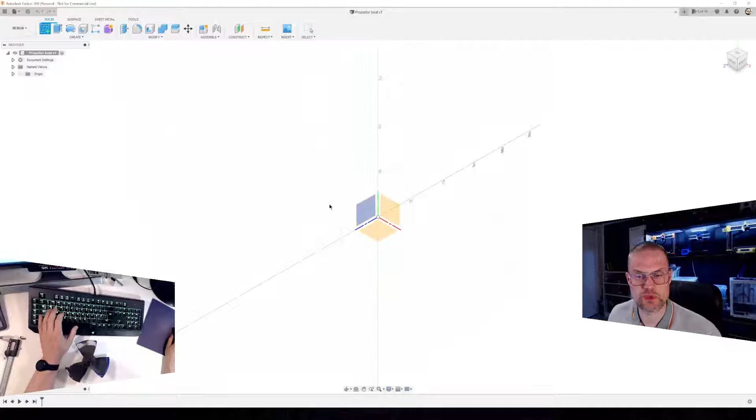To talk about the piece, as I see it, I have 2 things that I need to make. It's the cone in the middle and of course the fins. I only need to make one of the fins, and then I should be able to just copy them along this axis. So let's jump into Fusion. If I can make my systems work like this. Yes, we start with a blank piece of paper. And yeah, we can start by finding, are we gonna do it on this?

Like that. Okay. Normally when I do a piece like this, I will just start by making some measurements and put them into some drawings and stuff like that. But we are actually trying to do it a bit differently today. Fusion360 has this great way of using images as reference, and I'm just gonna find my image folder. There it is, and we will start with this one. That's the image, and over here you can see it needs a face.

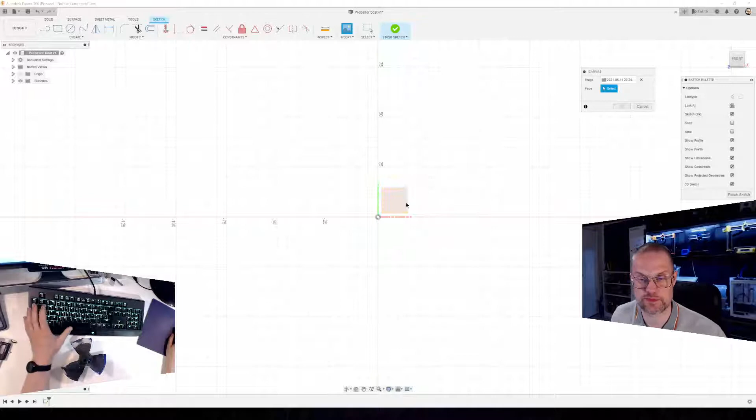For those of you who don't know, when you use Fusion360, you can only draw stuff on planes or faces. So this is of course a plane because we haven't made any faces yet. I'm just gonna pull it out a bit. Oh, there it came. Okay, let's just keep it there for the time being. I already know some of the measurements. We need to find out the complete diameter on some sort of level, but I think for now we will just scale it from this. Perhaps 12 millimeters, that sounds about right for something that's been machined for the purpose.

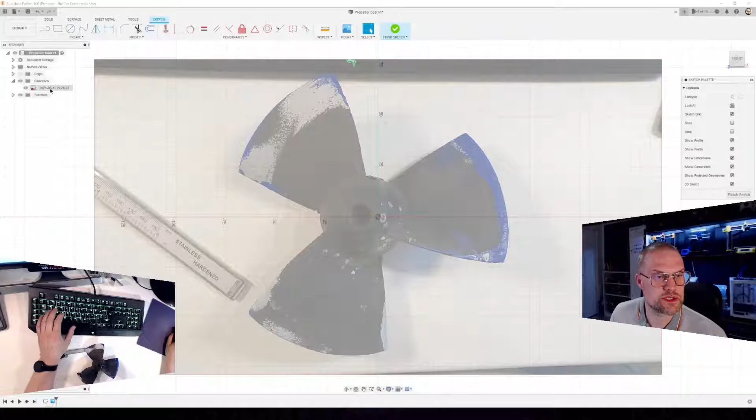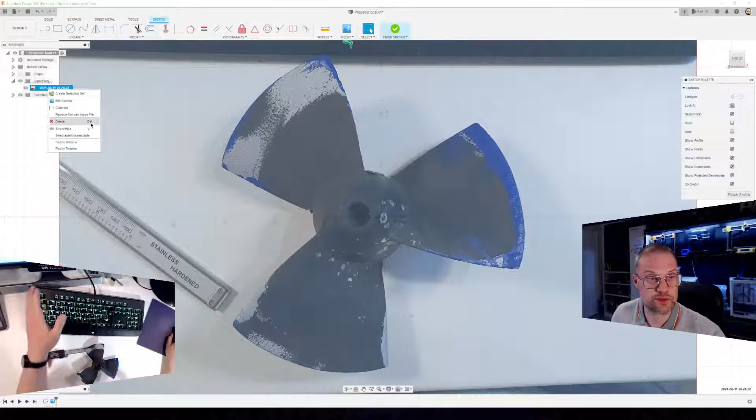And here comes the really neat trick. I want to put this right in the middle. Can I do that? No. Well, the canvas can be calibrated, which means that I can tell it that from this point to this point, perhaps I should have made a line first, but that has to be 12 millimeters. It will of course scale the entire image up. And I really want to put this in the middle, and I'll tell you why. Because that center point right there, that's where I want my middle of the drawing to be. I don't remember. Yeah, like this. Okay, let's see if we can get it in the middle.

Okay, it's late. It's very late. And my chat went away. There it is. Okay. Please tell me if you can't hear me or the background is too loud, which I don't think it is because it's actually not playing any music. That's weird. Super weird. Let's get this away.

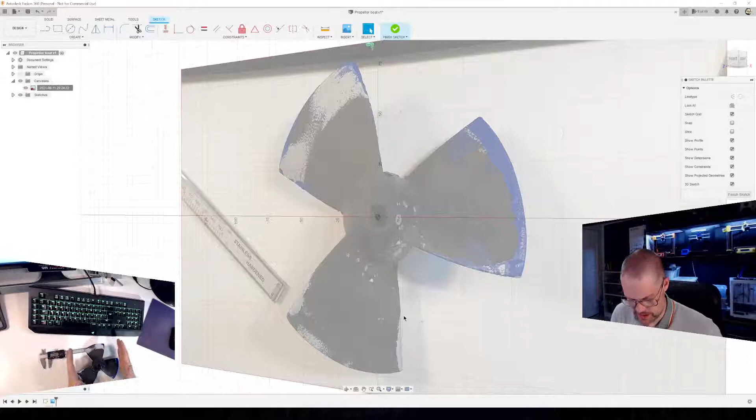Okay. Let's keep it there. Okay. Now this part of the drawing, I really want to make it on the other side also. I wonder if it would mean a lot if it wasn't exactly the same diameter, as long as it's not bigger, I guess. If it's 1 or 2 millimeters too small, I guess that could be okay. Perhaps. I don't know.

Thank you, Luis. It's always nice to know. I can't hear myself. That's why I'm asking.

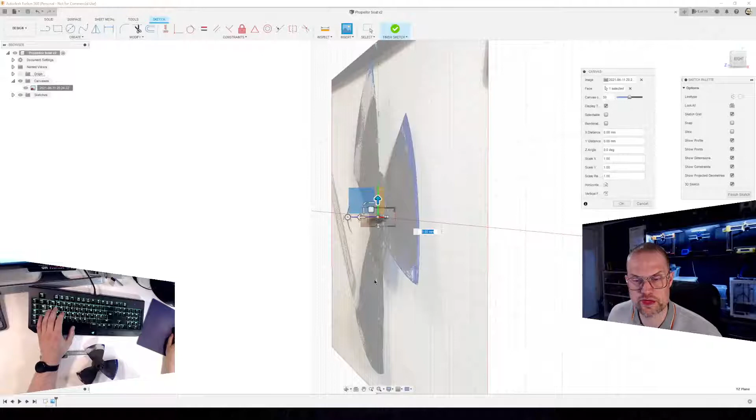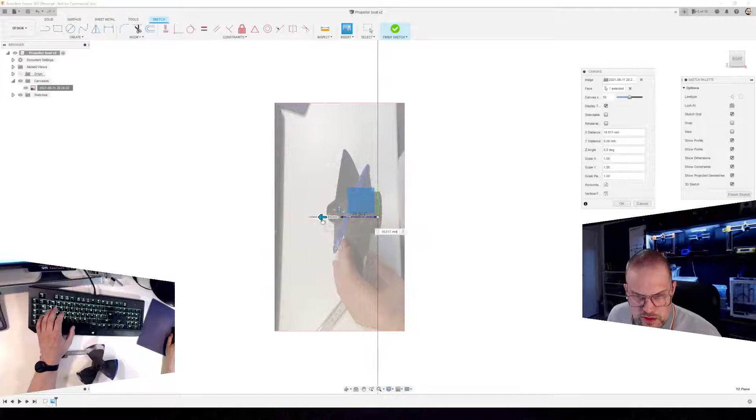Let's remember to save. I think we're gonna put in another picture just to show how we can do that also on the other axis actually. Okay, this should work. We want that going on this side, and we of course want it to be facing the right direction, and 90 degrees this way. And if we are very lucky, we can also make it sit like this, and I want it to be as close to the center as possible.

Okay, so this is a bit more tricky because we need to scale this up like the other one. And of course we could find some places and measure and do this again that we did before. But I think I am just going to do a scale to kind of just wing it a bit. Let's see.

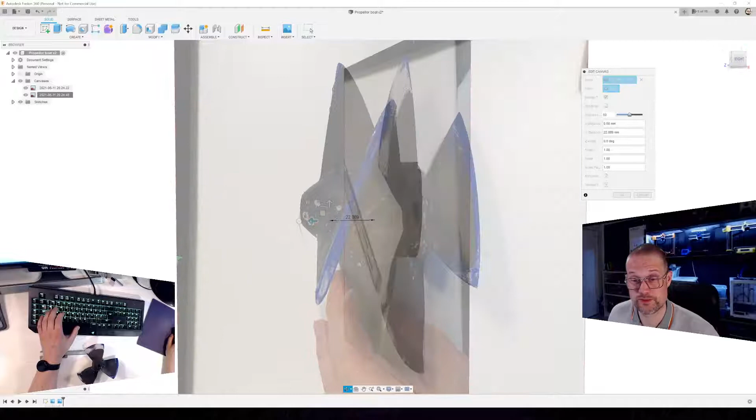And by the way, if tomorrow I find the CAD files for this, I'm just gonna be very annoyed. To be honest, I haven't looked. Wow, that would be really not great.

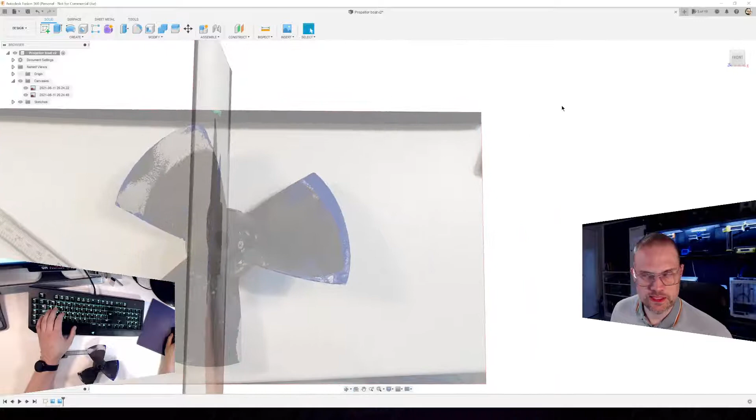Okay, we have some of the contours now. Let's just keep it at that. I can, of course, turn them off if I think they are being super annoying. And I think I'm already there. Let's try to sketch up something. I am going to create sketch. I'm gonna do it on this plane. I use a lot of shortcuts, I hope that's okay. C for circle, makes sense, right?

Okay, I know this circle size because it's this very destroyed piece here in the bottom, but I think I can manage to find out what it's supposed to be. I'm guessing that mostly will be rounded up sizes, but let's see. 57 millimeters. Okay, so something on my drawing there went very wrong, because let's just make it 57 millimeters, and as you can see, that doesn't match at all to my drawing. So I'm guessing the correct thing to do now is to just make this a cylinder form, and we will cut it to shape afterwards.

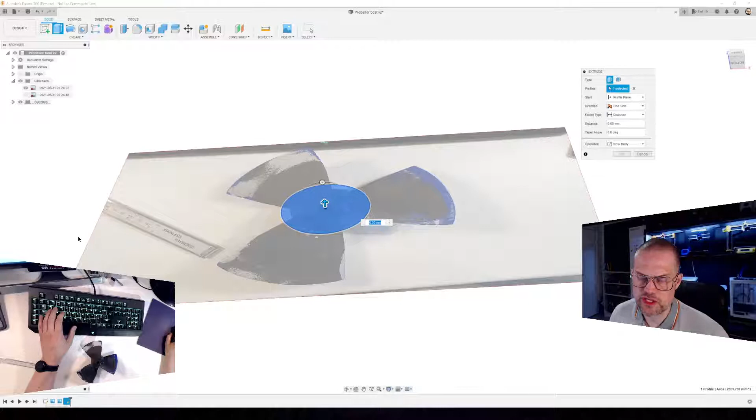Damn, I was really hoping that I would be able to use these images. I've done it before, but of course not to this kind of scale. Okay, we need another measurement. We need to know the measurement the other way. I believe it was, yeah, 70 actually. Yeah, 70. And I always design in a way that I start with building everything on the outside and then doing all the holes last. So let's just do, oh wow, it took me what, 10 minutes to make a cylinder.

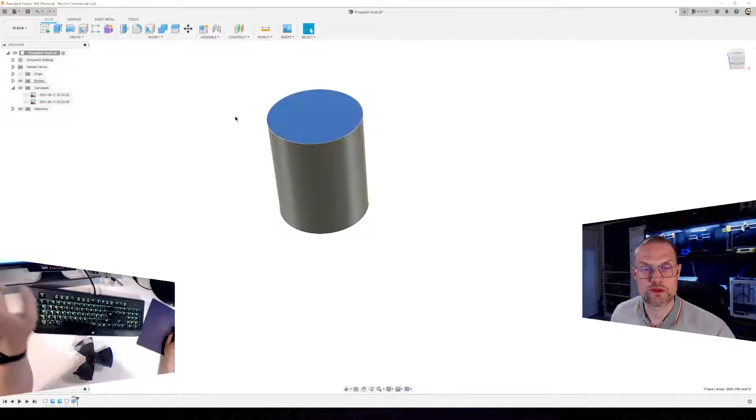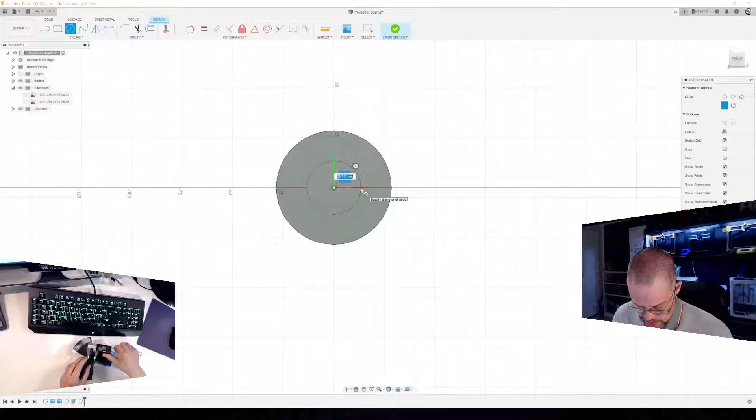Well, okay. The top thing here is a plane. No, it's a face. Sorry, it's a face, which means that it's something I can draw on. So I'm gonna do that. I'm gonna flip it over. And I'm gonna do another circle. This circle is my outer circle here. And it's 19 millimeters. Like this.

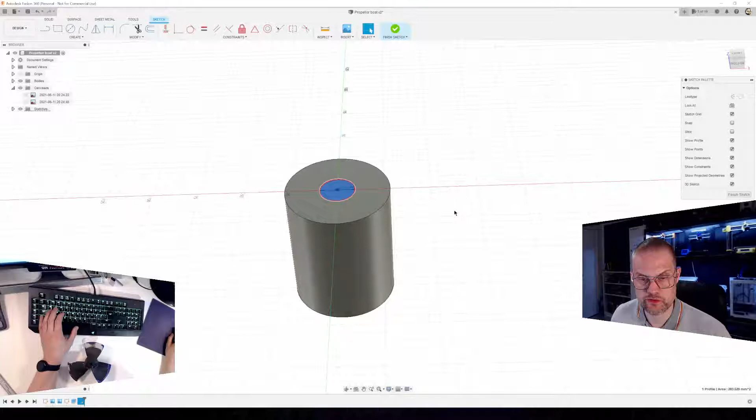And I am not able to use that for anything else than just to try to make this. As you can see, it of course has this, what's it called, cone on the head. And what I wanted to use the images for was actually to be able to reference this part right here, but let's see if we can't do it anyway. The best way to do this would be to, yes, let's just keep that drawing sketch right there, and we are going to make another sketch, but this time we will be going inside this and doing it like this.

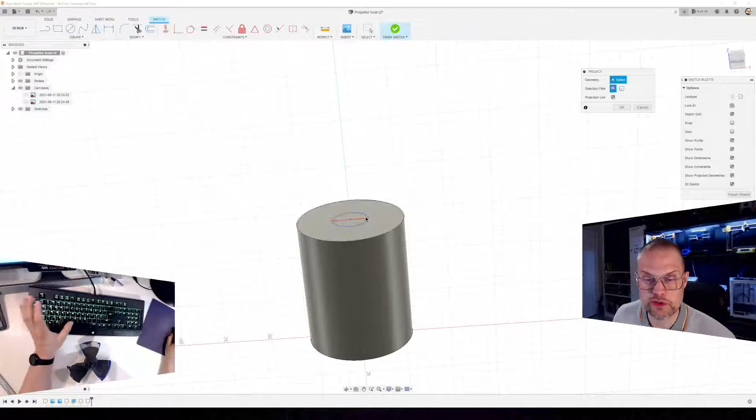The most powerful tool in Fusion 360, if you ask me, is the shortcut P, which is projection, which is a tool you can use whenever you're in the drawing area. I will project on the current plane I'm drawing, project whatever I highlight like this. It can be the circle, it could be the one in the middle, just the face, or I'm actually interested in this part right here. And then if I go to this side again, you can see it has marked up my 19 millimeter circle.

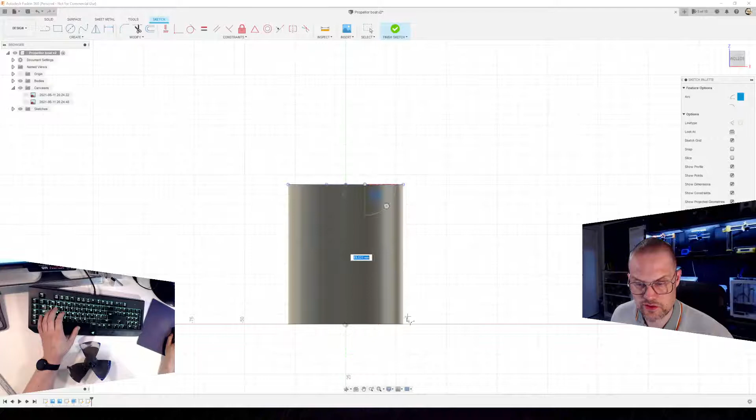And now I would really like to be able to do a 3-point arc, I think, from this down to this. Oh, this one is not projected. P for project, choose, okay, got another helper, like that. Okay. It's not gonna cut it, is it? Because this, it's gonna,

L for line, of course, well, it's not of course, but it is. X, I'm gonna do a construction line. A construction line is just a dotted line that doesn't have any kind of impact other than you can use it for help and stuff like that. 3.9. I am not gonna do a dotted line.

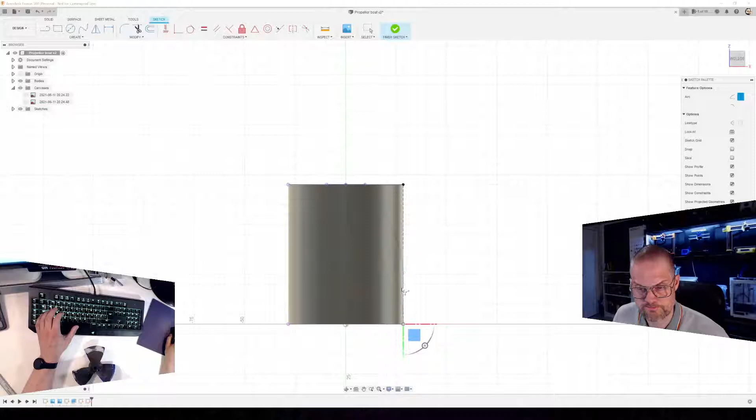Look at this, it's actually not that bad. We're gonna go ahead with this one. And I did a little thing wrong.

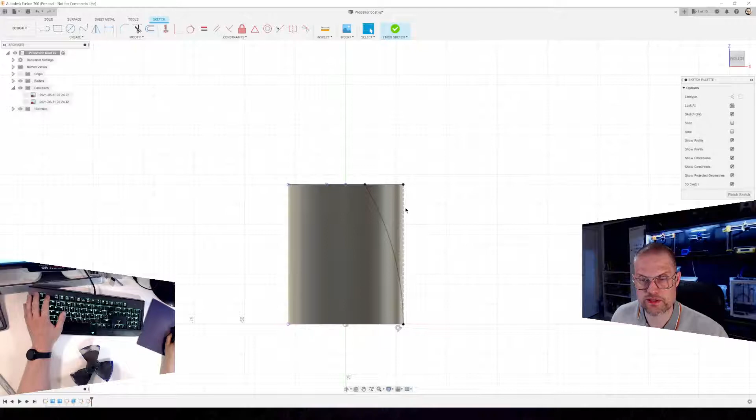You can always change your lines to be construction lines or real lines, or just lines. Highlight it like this, and you can either push this construction away or just press X on your keyboard.

Now this needs another line there. And of course I now made a sketch inside this cylinder, which makes it absolutely not possible to reach. But we got a way around that, because we made this as a body. We can just do like this. And I want to have this thing used as a tool to cut everything around that's not needed.

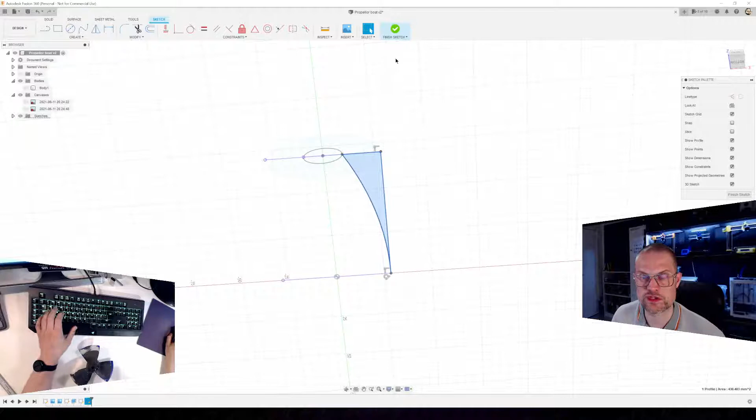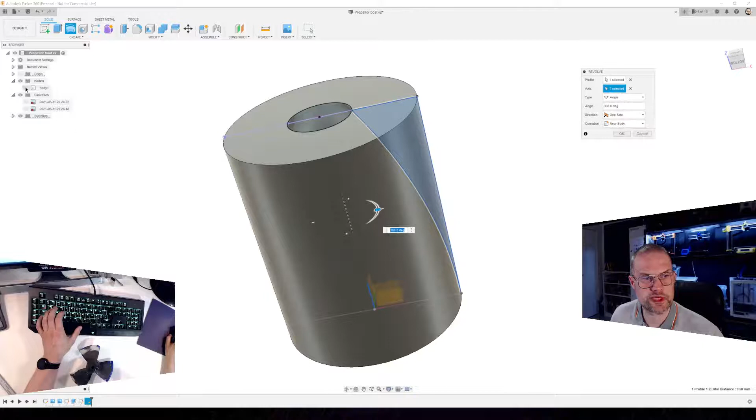Now, since I don't have the body we made before viewable, it's gonna try to do a body with this, like this kind of cylinder, so you can see it all. And as soon as I reapply the body, it's gonna be red, showing me that I'm gonna cut everything out, and we're gonna say okay.

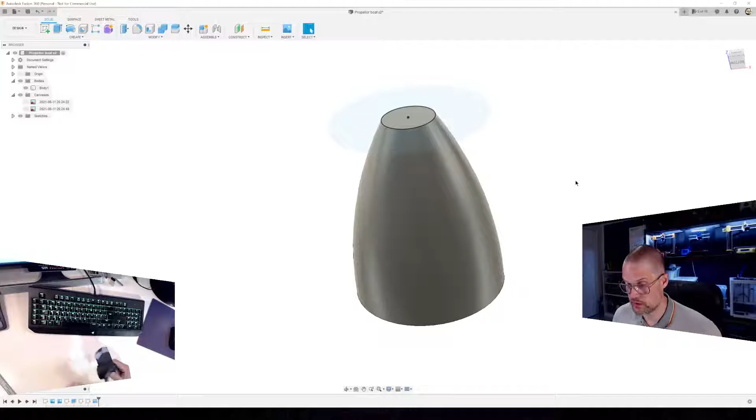That's it. We made the first important part of this propeller thing. I'm really excited about the fins, because I've used 15 minutes making this, and I know it's gonna take me at least, I think, 30 minutes to figure out how I'm gonna make the wings on this thing. But let's try at least.

I am definitely gonna use this. Well, I'm gonna scale it up a bit, I think.

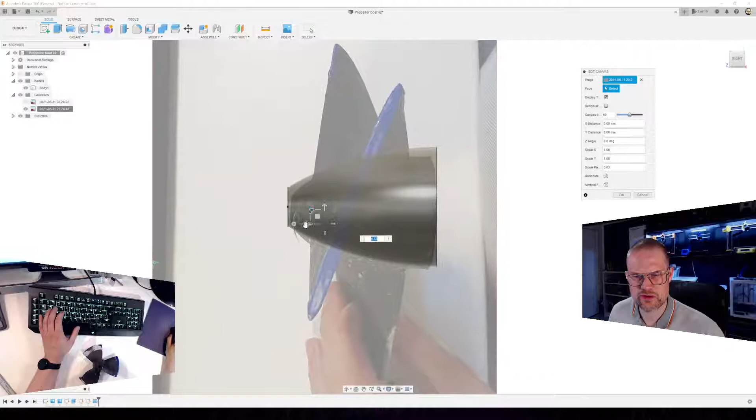Canvas, edit canvas, let's see if we can get it to make a bit more sense. I'm guessing it's something to do with the camera angle that the picture's been taken. Not perfect, but it's not far away either.

Right there. Okay, so as you can see, we have this very fine outline here to actually put on some well, quite usable sketches to draw from.

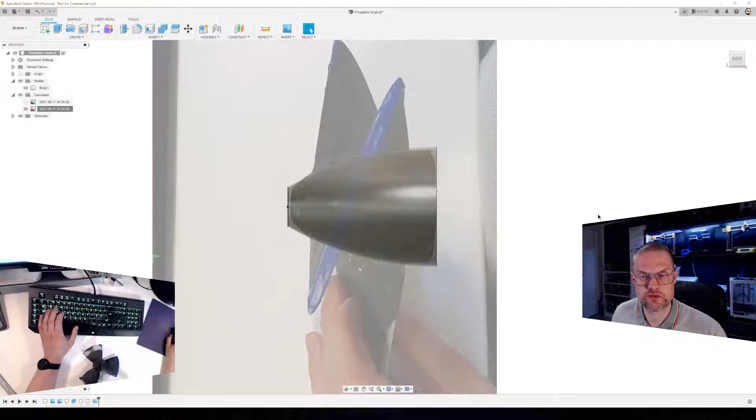So I am going to figure out where from the center - can't see anything - okay, from the center of the cone to the outside here.

I guess I am going to make this straight to begin with, and then, just like I just did, do something like a round cutting when it's all done to make it like a round propeller. But now I need to know from the middle to the outside here how far, and make a plane I can sketch on. So we are taking our trusty calipers and finding the middle.

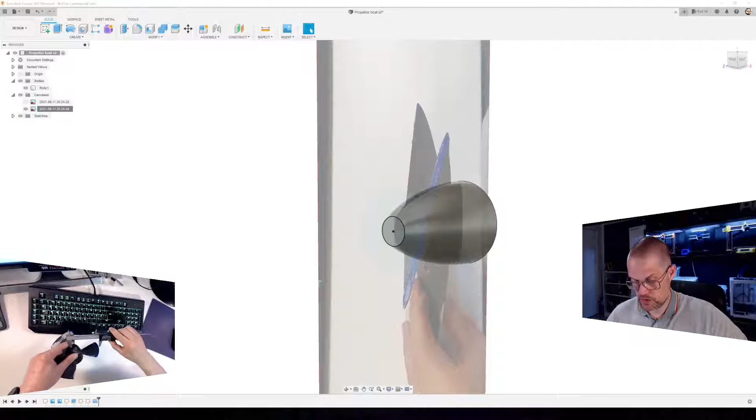The great thing about this Fusion program is that if I get any of these measurements wrong the first time, I can always go back and just change the measurements in the sketch, and it will just reapply them to the entire model. I remember a couple of times where the model just totally screwed up when he did, but it should be able to.

88 millimeters. That means that from the - we're gonna construct a plane, which is an offset plane. We're gonna offset it from, of course, this plane, which is the middle. And we want it 88. Let's make it 89, like this.

Now we have what should be the correct outside measurement of the - yeah, let's hope. Okay.

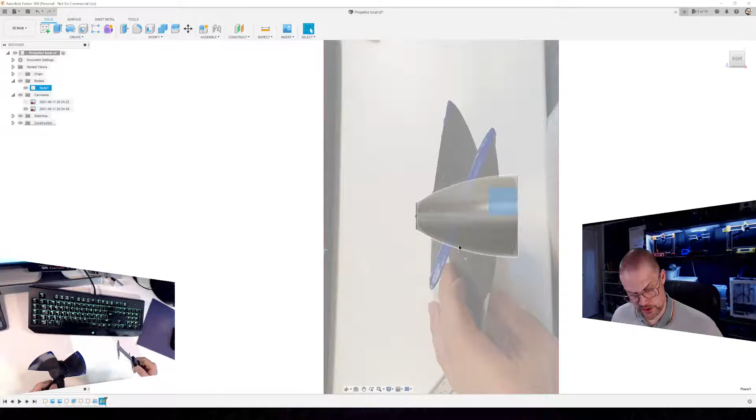I now see a little bit of a problem here because I want this fin to be the correct size, and - that's actually kind of funny, it's the same size this way as it is from the center and out. I wonder if there's a reason for that. Yeah, I should have become an engineer,

but I didn't. Okay, so we are going to sketch on this right here, and we are going to get the helper line here and the helper line there. And we are going to find the middle, because at this point we need the middle. Construction line down the middle.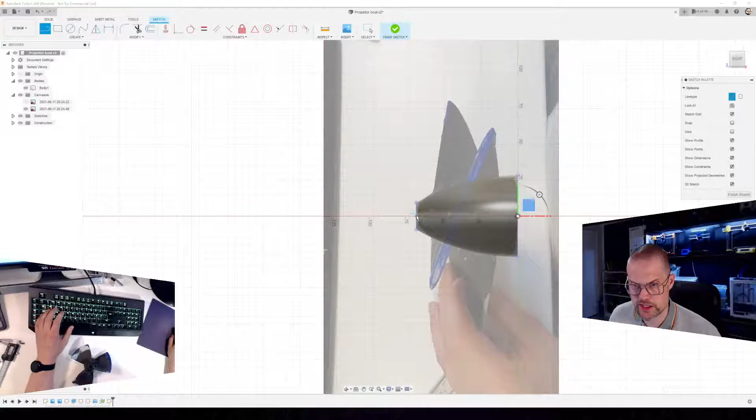And I want to be able to make this part right here, but I want it to sit in the middle, aligned on the middle on this right here. How can I do that best? I can, of course, draw a line from here to here, and from here to here, and

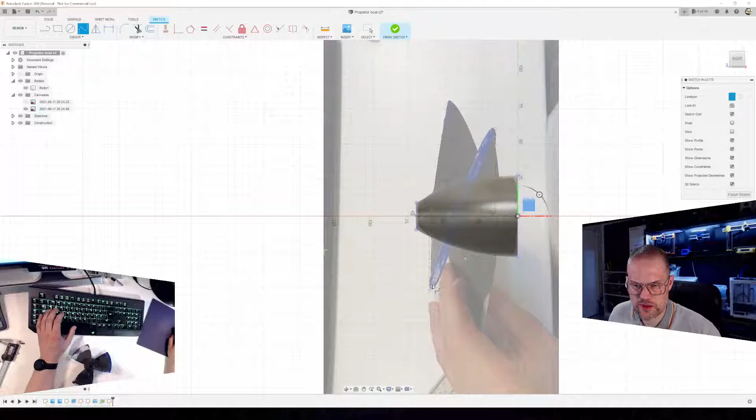actually I should be able to - this is the finger - let's try to make a spline. Here, middle. Something like it has a little bow and wing.

Oh, I really want to make this aligned on the center. No help on the chat so far.

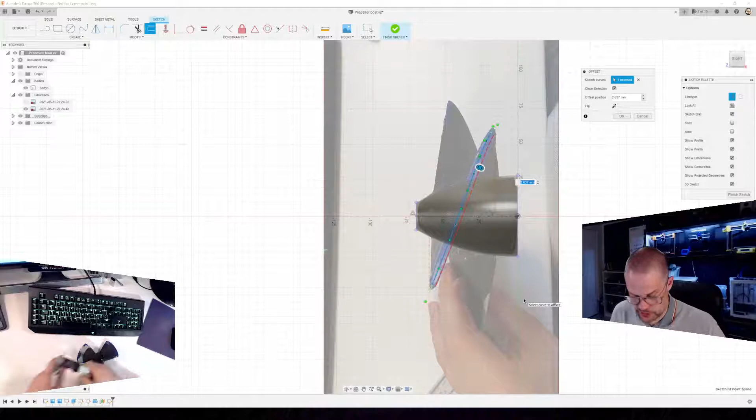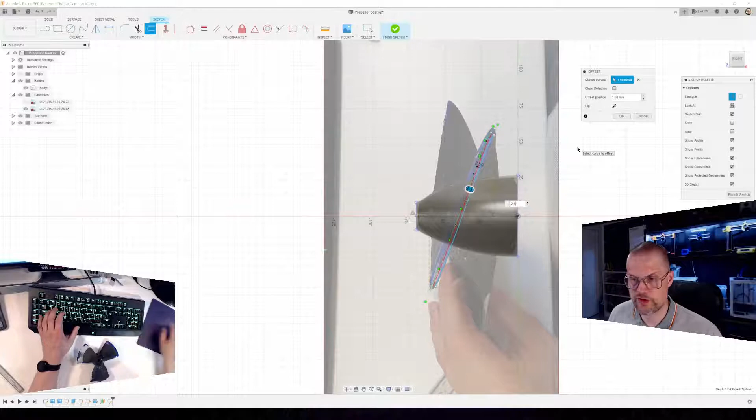How wide are these fins? I wonder if they started as 5 millimeters and the seawater has just taken it out like this. X, because we need this line, and I want to make this one offset. O for offset, minus 2.5, okay, highlighted, and X.

I guess I can hear engineers screaming at me. Just...

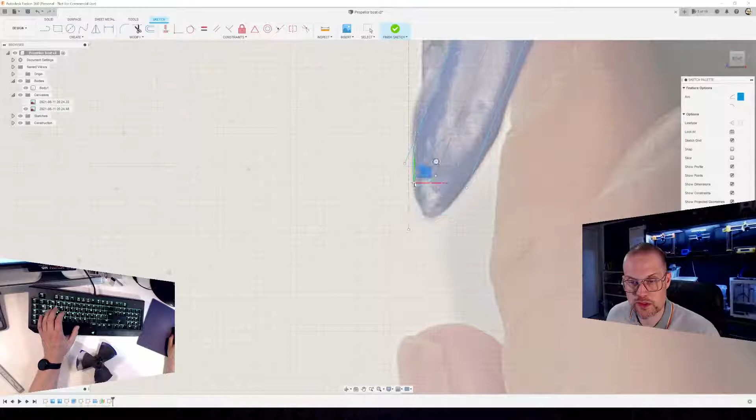Now I wonder if I could find the middle. I should be able to find of this right here. That was the middle.

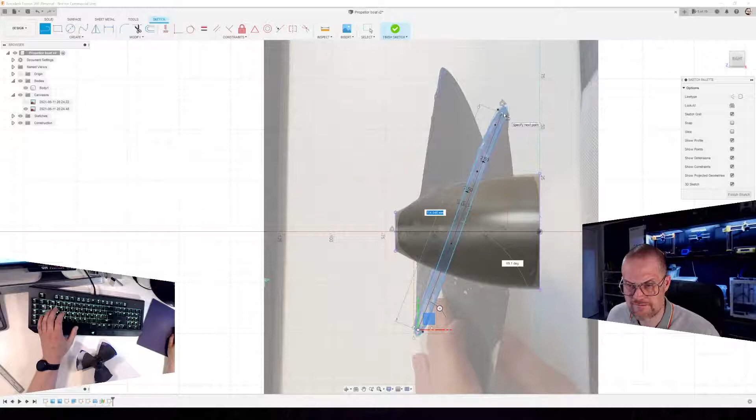This is a very funny project. I'm glad I agreed to it. Hey, let's build a box.

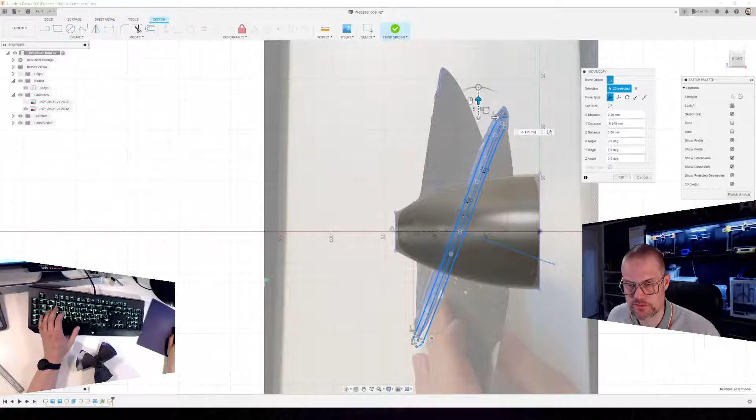What I'm thinking is perhaps I can take all these—not that one—and perhaps move it. I'm not sure. Yeah, I could. That's pretty cool. That way, I think I kind of found the middle.

Actually super excited if this is gonna work.

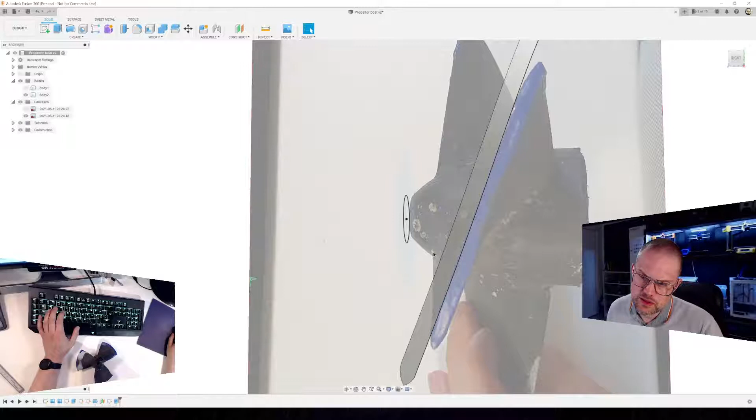You know what? I'm gonna make a sketch on the inside here, like that. And I'm gonna make the image—I can edit it, I can do it like this, so I can better see it, yes.

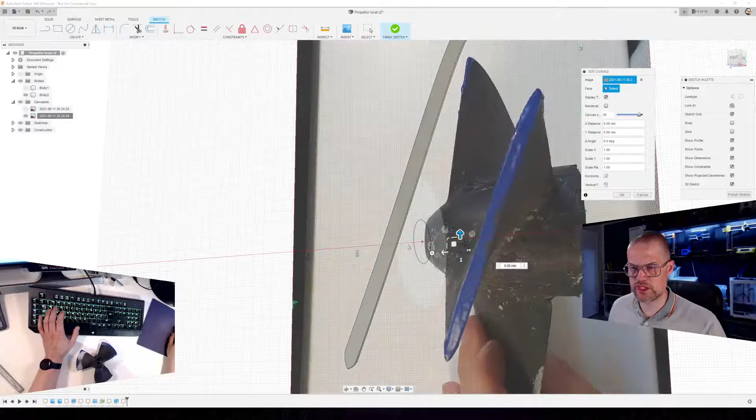This should be okay because I've been putting this in the middle. It's the way the fin's been photographed, that's on the outside, so it should be okay to use this line for my current body. Let's try that.

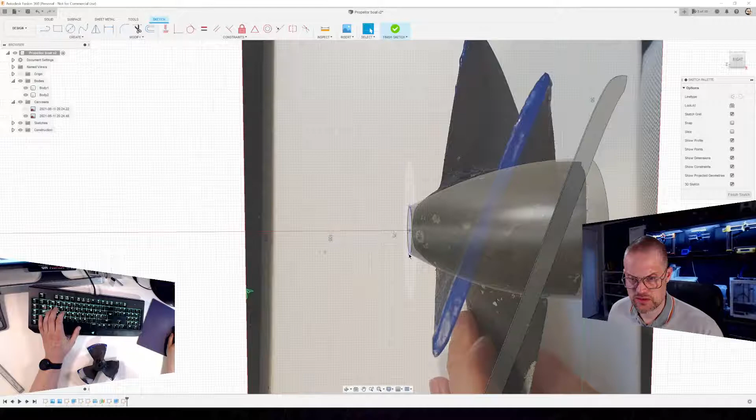How is the best way to do this? Yes, I need to project this entire thing. And that's only going to give me the lines, of course.

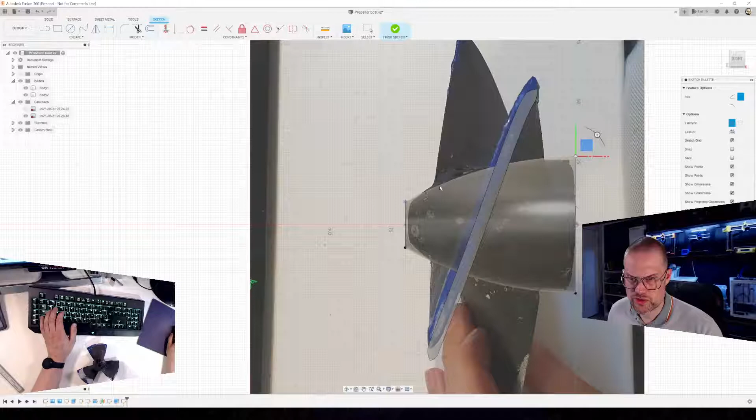And I can then do my own 3-point arc as a construction line right down here. I'm going to make one over here also. It should be able to go. Nope. Okay, I'm actually kind of puzzled by how this one snapped to this when this one doesn't want

to do it, but it's not a big deal because I have a center line right here, and I can just highlight this. S for toolbox. That makes sense. I'm just gonna type in MIRR, and then I have my mirror function, which is also one of the tools I use the most. I'm gonna select an object to mirror and the line to mirror it about, like this. Okay.

And then I'm gonna remove this body again, like that. And we are going to try to figure out how to make this piece in here go in the right direction. I'm gonna try to do as many tools today as possible.

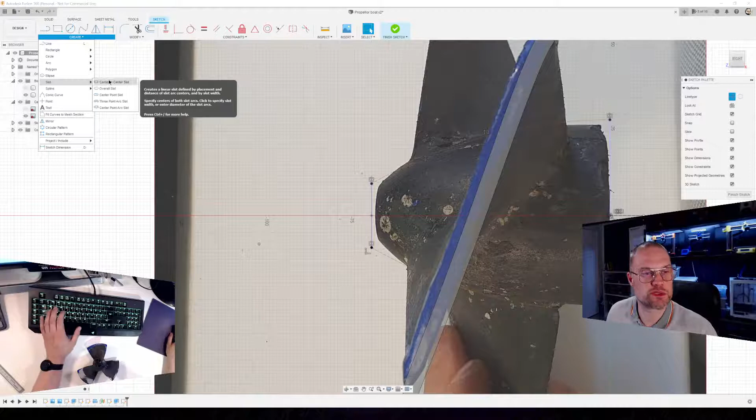And now I'm gonna do a 3-point arc slot. It has to go a bit inside, and all the way up there, I think. How is it projected this way? And I look at it, is it going? I'm just following along the path there.

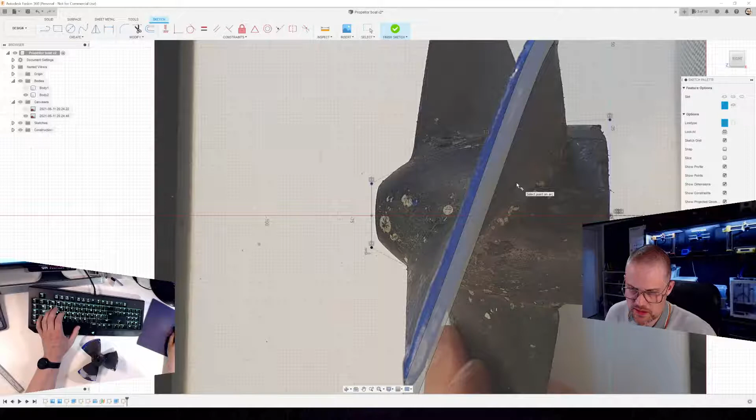I have no idea if this is going to work. Let's just try it. I'm thinking that I need to keep it inside the... like that.

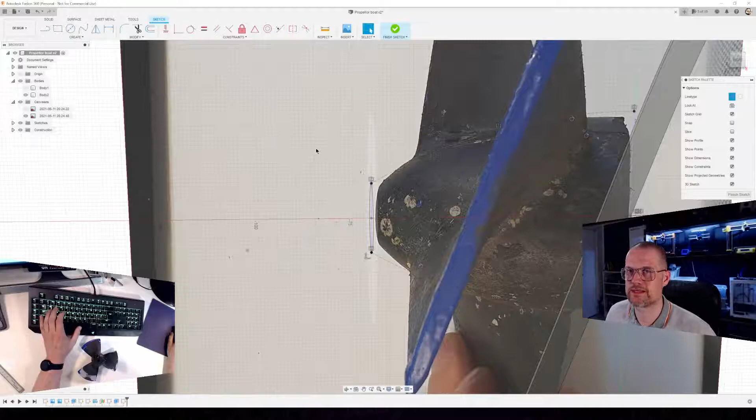Oh, and by the way, you are not supposed to do any kind of sketches that aren't that you haven't made black. I kind of skip that part all the time. That's of course sometimes why my drawings screw up, but it's not that big of a deal for me.

And what I need to do now, if it's to be correct, I need to put all the measurements I can find in this thing right here and just keep going. That one won't work. And I need to put it up against something to make it hopefully end up being black.

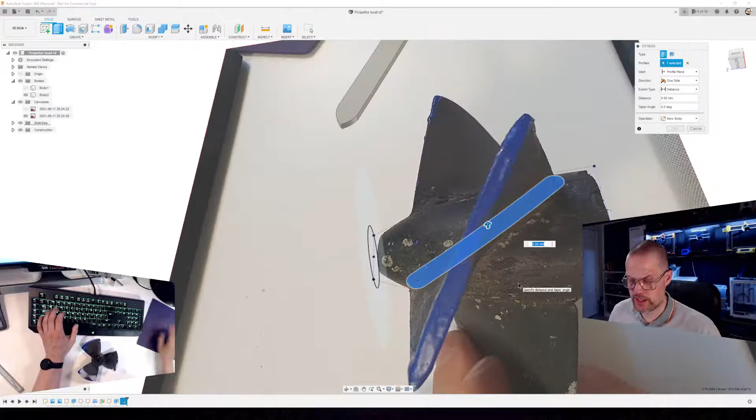Yeah, sure, we're gonna make a little bit of a body here also, 1 millimeter like this. And now we are going to do the magic, hopefully. Let's see. S, toolbox,

LOFT, loft tool. Oh, would you look at that. That's not gonna work. Let's see if we can remove some of these. Oh, that's not the correct one. Why would it do like that?

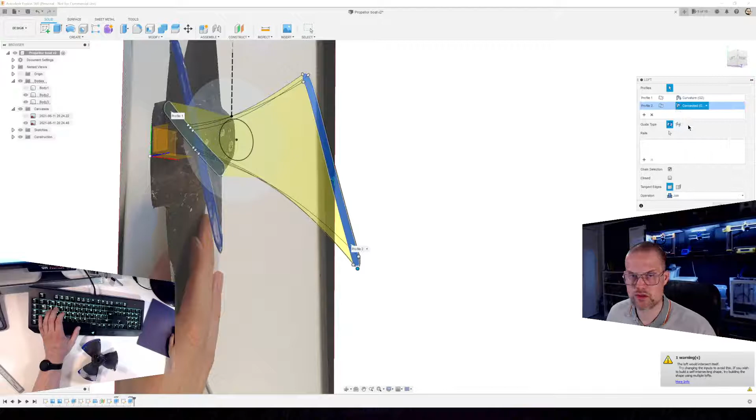SLOFT, loft, like that. And of course we need it to be curvature, and also the other one, curvature. Okay, that's definitely not gonna work. Let's see.

Like that. And that one. My graphics card's really working hard now. Okay, and perhaps we are lucky, at least we'll go down there.

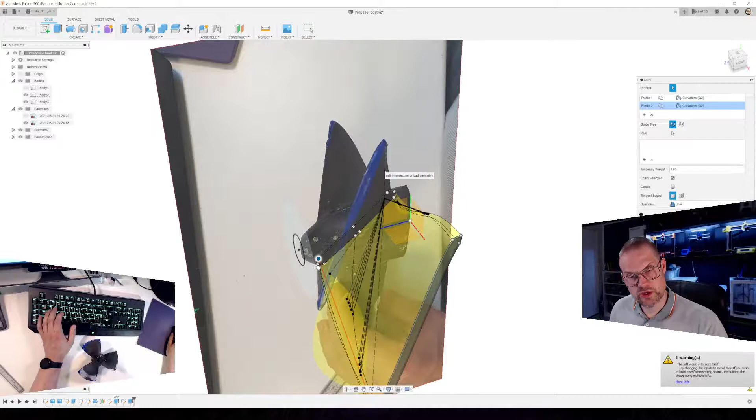I don't really understand why it didn't do this on its own. It won't even be working on it. No, it won't, it won't. I was so sure. Did I type... why won't you? Oh, there it is.

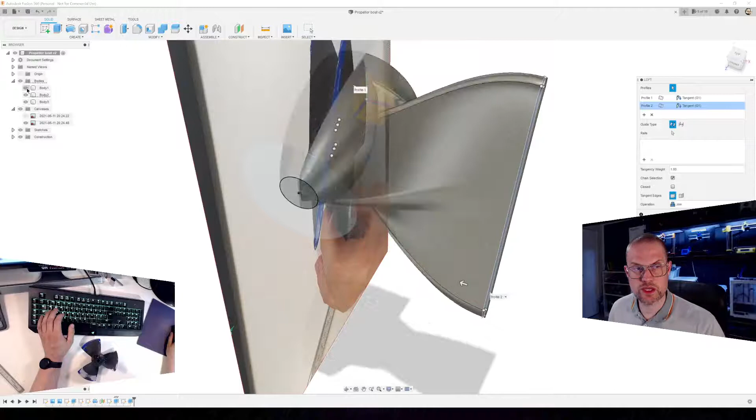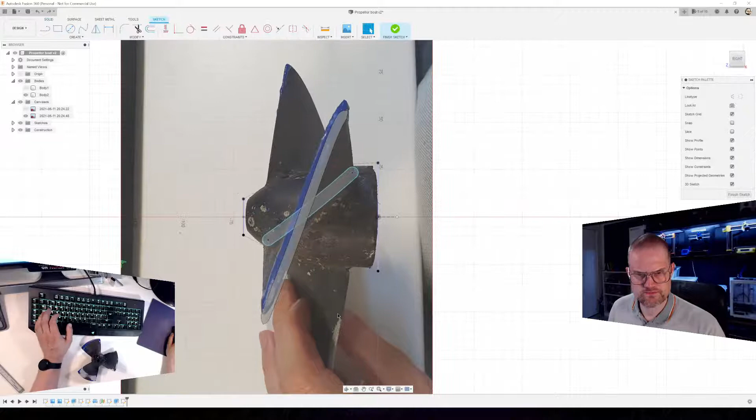There is one little thing I didn't think about. When I put this one on... oh, don't do that, please. Oh man. Okay. A lot of help I find in the chat right now. I know I have been doing this before, kind of, but I, for the life of me, can't figure out why this doesn't work.

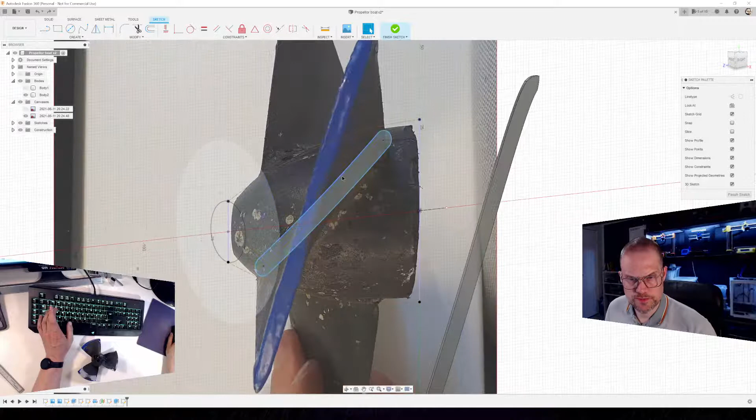Perhaps I should do it a bit more, because we need to be able to go past this thing before we... or at least some of the way, like that perhaps.

And I'm actually also thinking that I would be better off if this piece right here had the same kind of layout as this, which is actually not too difficult to change.

We have the end parts right there, we can do this. Got an idea, like this. And we are going to do this slot thing again, 3-point arc slot, like, let's just make it like this. And we're gonna bow it to our will.

So we know it needs to be 5 millimeters, like that. And we can then make sure that we have the entire... I'm guessing that's it.

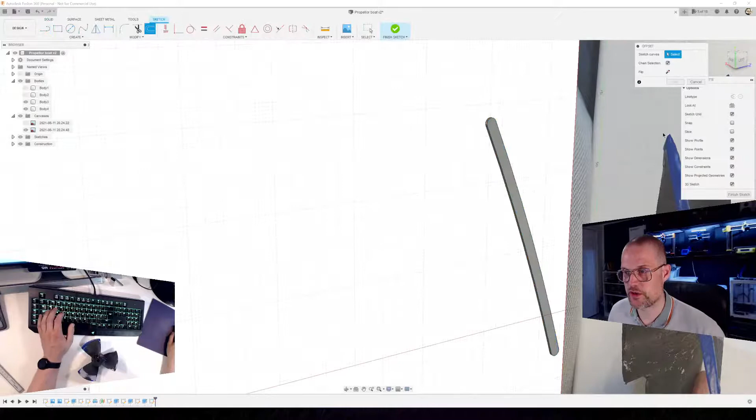Now we have 2 more identical pieces, which hopefully should help us in the lofting department. S-L-O-F-T, loft. Okay, already that looks better.

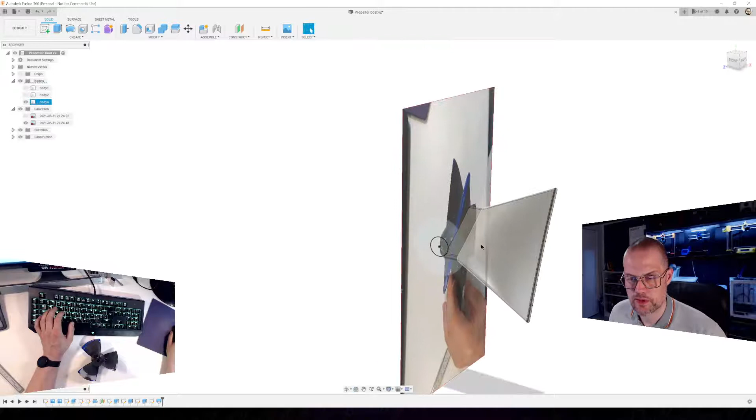So I'm gonna do that like this. Now I want 3 of these fins, and as I said, it's been 20 minutes now with just figuring out this baby right here. So let's just quickly try to...

Well, we can't revolve this because this would just make one big fin, but we can do a pattern, circular pattern. Create over here, pattern. If I wanted it to be spaced apart, like holes in a board, I could use the rectangular pattern to make like a pegboard with a lot of holes or patterns into it.

I'm going to do a circular pattern. A circular pattern, of course, needs an axis to turn around. The object is a body, and I've already selected it. It's highlighted in blue. The axis is, of course, our ever so lovely blue axis.

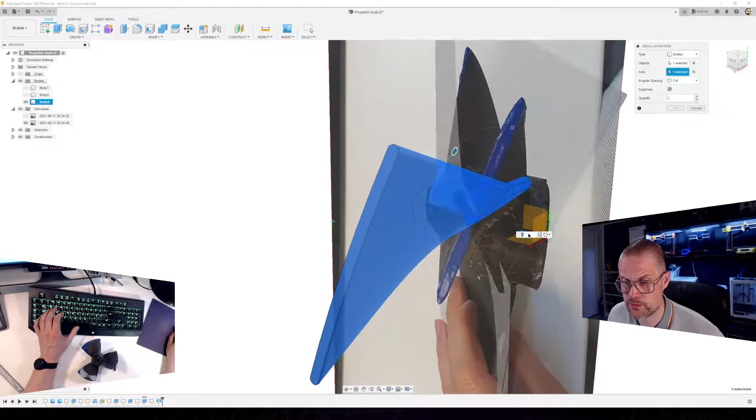And it kind of wants to do 3 on its own. Let's just try to remove the canvas. If we wanted this boat to go very fast, we would, of course, just drive this up and say it has to have 10 of these. I'm just kidding, it won't work. But that's the idea, 3 pieces of these.

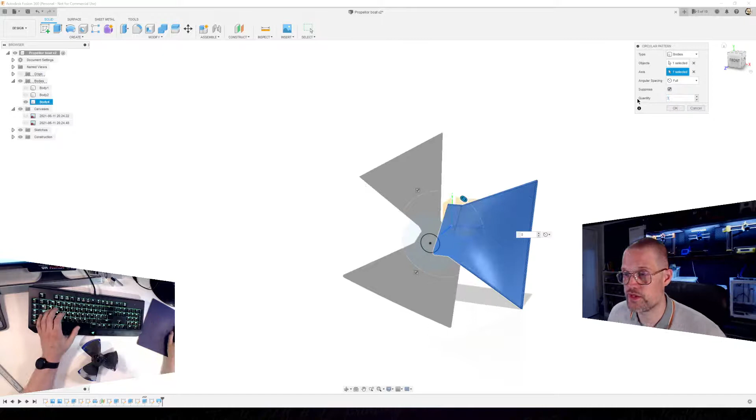The angle is, well, I can choose what angle it has, but it just aligns them next to each other. I don't know, perhaps it looks... it's kind of a propeller.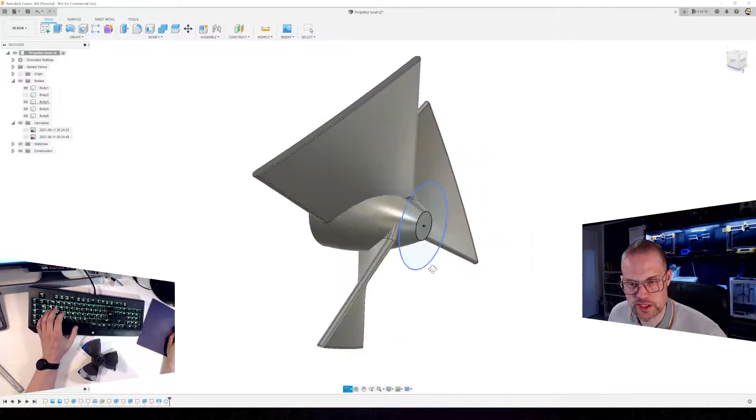Of course, we need to do something about that piece right there, but that's the beauty of 3D modeling - we can always change it later. Okay, now I really want to show you this can actually look like this before we close off for today.

So I'm gonna do a new sketch. It doesn't matter where, it just has to be on this side. I'll project this because I need that line. C for circle. I'm going all the way out there, and I'm helping myself to this one. This right here is one of the ways you can do it. I can just simply press E for extrude, and I'm gonna extrude this a distance.

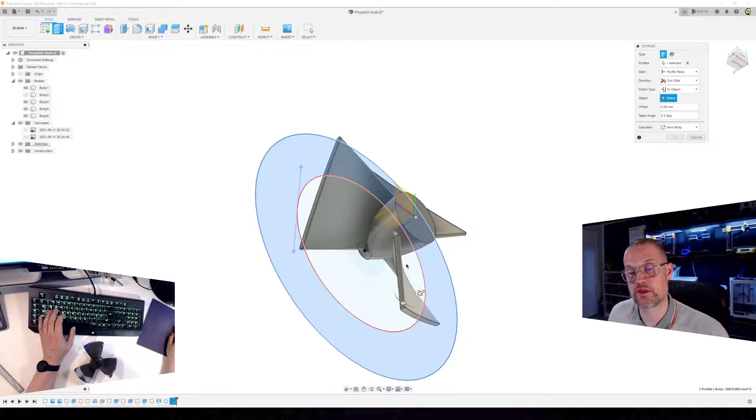I almost always use this to-object thing, because if I choose the bottom here and later make this another measurement, it will automatically recalculate because it's kind of locked to that part right there. So let's see this propeller.

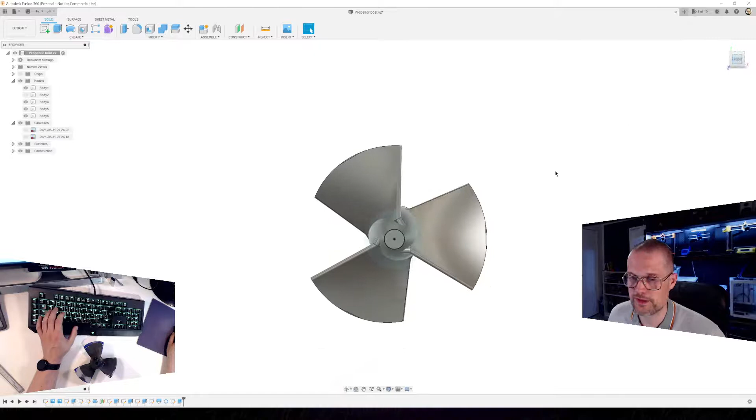Yeah, I'm just gonna go back, but we have a propeller. It's not perfect. It has some things we need to figure out. First of all, we need to make this one piece, and then we can do the fillets, which of course are along this edge, both to make it strong and also, I guess, to make the water move better around this cone part right here. But so far so good.

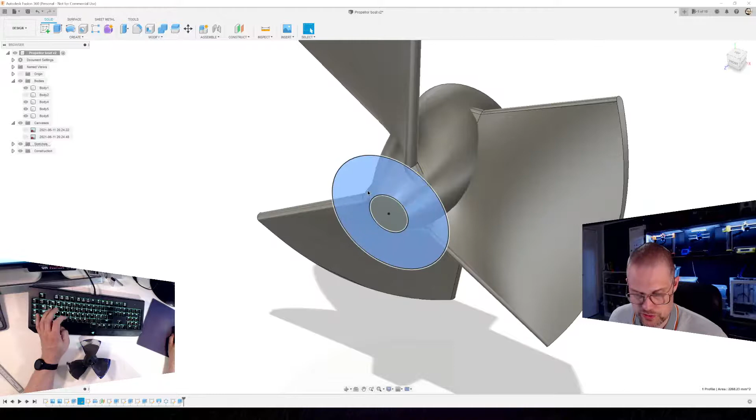Let's see if we can make these a bit better. And this is actually one of the very powerful things in this software. I need to know where I made this extrude. I'm just gonna press V to remove this annoying thing. This extrude, I made that down here in the timeline. I need to find it. Oh, it was right there. And I can always open it again, say edit feature, and it will go back. It hasn't removed or destroyed anything.

I'm just back in the timeline, and now I can say, well, 14 millimeters out, that was too much. Let's see if 5 millimeters can help us. And this is the part where it's very exciting to see if this will actually work, because either it works or the fins screw up. Let's see. Oh, would you look at that? Wow.

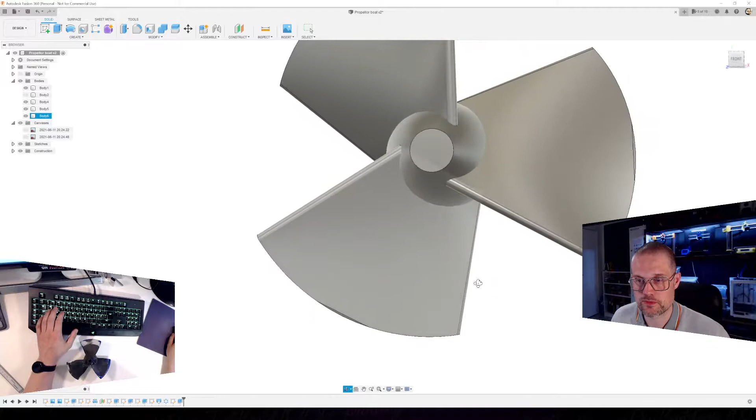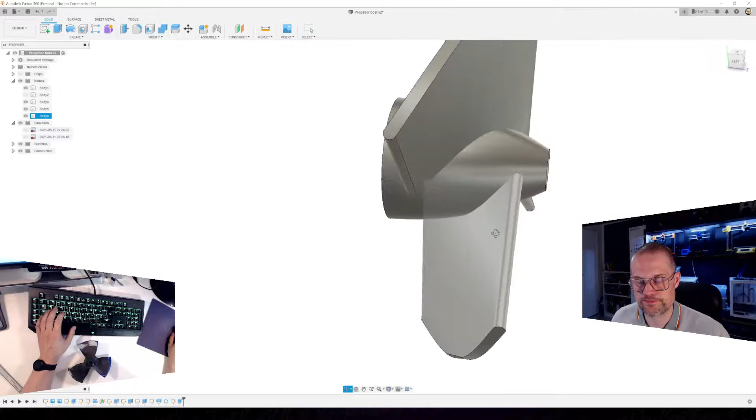The only thing is that, if you see, there is room alongside the fins here. We don't have that on our propeller, so we need to do some kind of adjustments. But I'm calling it. We made a propeller. I'm actually also going to take all these and, just for fun, make them into one, and then I'm going to make fillets on these. Another powerful tool. That's not enough. 8.

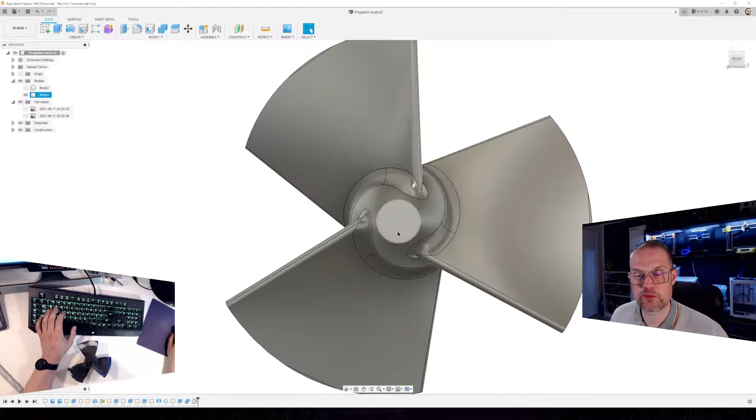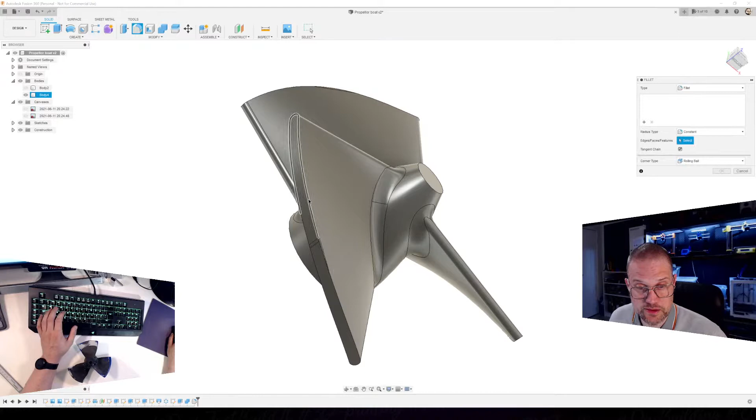I think I'm gonna read up on if it will have issues, the fact that it's on top of the other one right there. I really don't know. Another place to make fillets is of course also on this part, but this part needs to be cut a bit more to make it more even. Which is also a thing we can do, because we have also made that one. Oh, no, we can't. But we can find the drawing that made this right here.

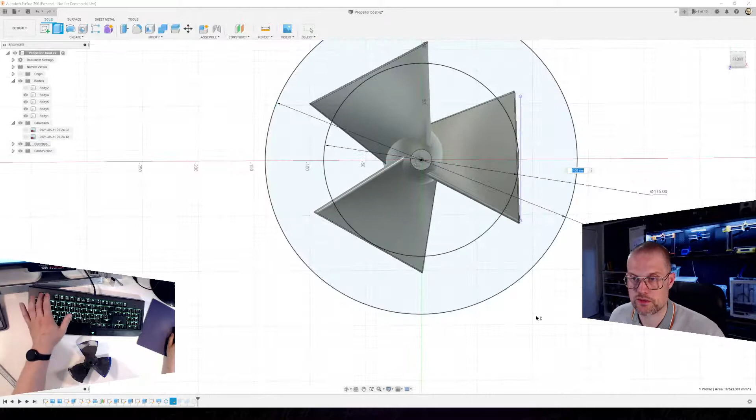Edit sketch, and I did again something very stupid. See, now it's black. 175, like this, and this one is 280. Now they are black, now they are locked in place. And I'm just gonna do finish sketch, and yes, it's working. Okay. I'm kind of puzzled about the fact that they are on top of each other from top to bottom of these fins, and I'm not entirely sure that that's okay.

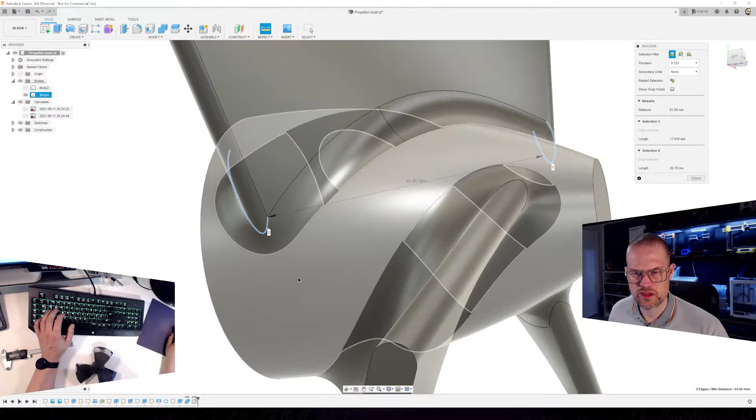And if I measure this fin right here, it's 60 millimeters. And if I take my measuring tool, if I can find a spot, of course I can. Annoying. Let's just do it like, kind of. 61. I wonder if I can just make the cone bigger.

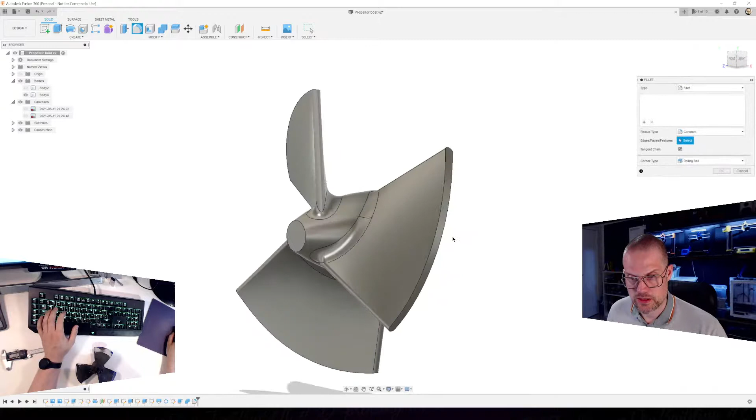Well, what do you guys think? I think we have something we can work on. Obviously, we need a bit more time to work on this, but I think I'm gonna call this a wrap for today. Perhaps this will go on a boat someday, but if not, I hope that you've at least enjoyed the video and learned a couple of things along the way.

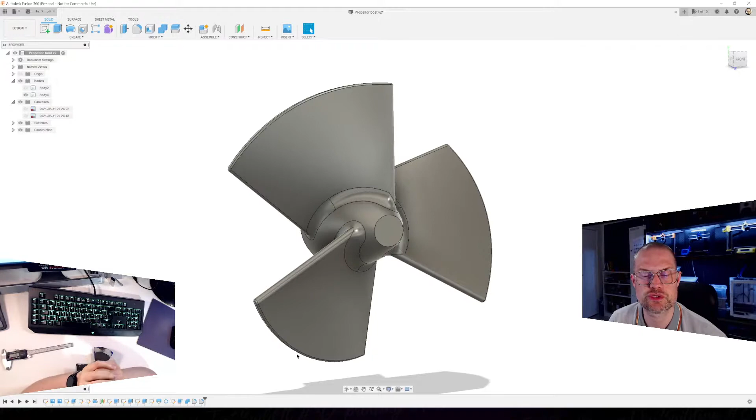I'm gonna go to bed now, and I'm gonna think very hard about how to get the rest of the issues sorted out here.